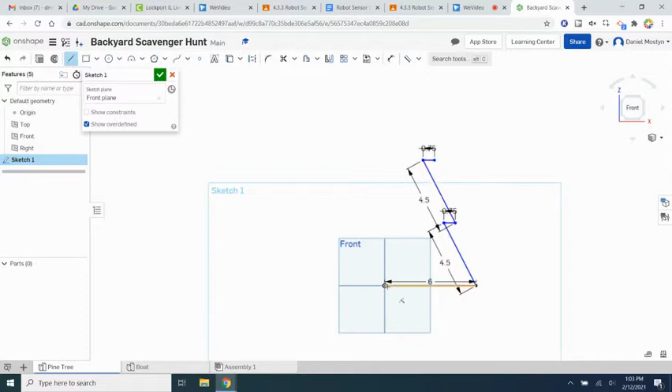All right, so that's the first object for my scavenger hunt. Let's go ahead now and do the boat, and then we'll make some drawing sheets that we'll use. So let's do the boat next.

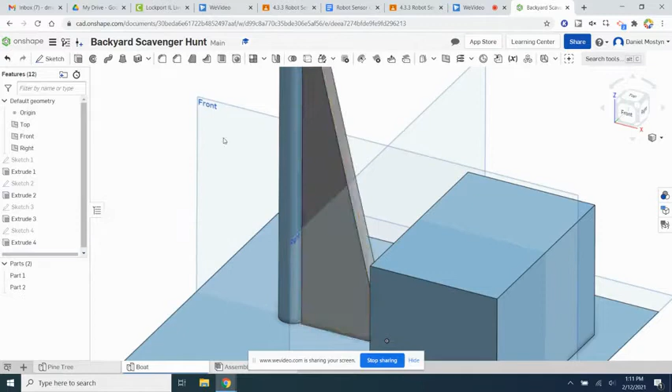All right, so this is not like an awesome boat by any means. It doesn't even look like the boat in my backyard. That's my neighbor's boat. It's a sailboat, but whatever. It's not a big deal. It's the idea of a boat, I guess.

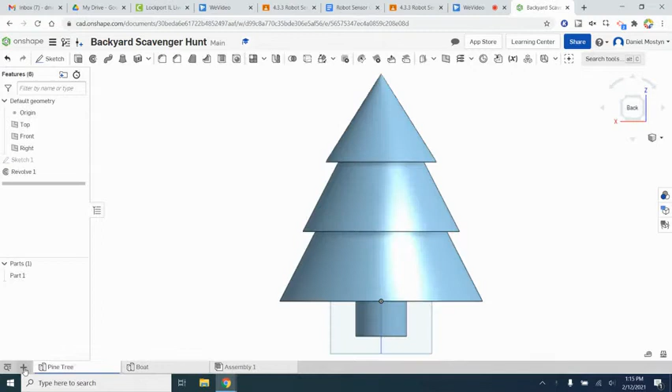All right, so the next thing we want to do is, with our pine tree and our boat, we want to create a set of drawing sheets. What we're going to do is we're going to dimension these so that someone else could recreate them exactly. So I'm going to go in now and I'm going to dimension both of them. We're going to do 2 sheets.

Okay, so let's just open up the browser first. We'll click the plus sign. There are 2 sheets now. First sheet, we'll do the tree. And the second sheet, we'll do the boat. And we'll use these on our ThingLink eventually. All right, let's get started dimensioning.

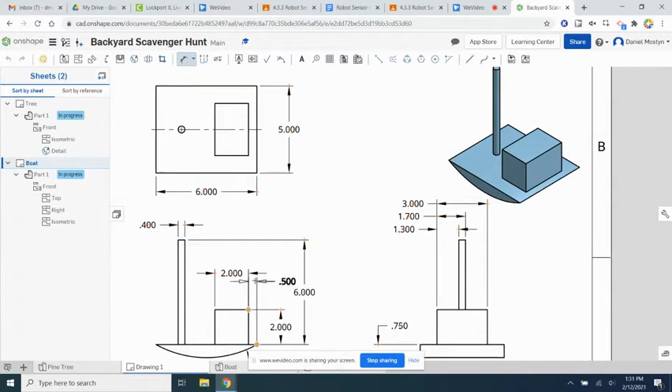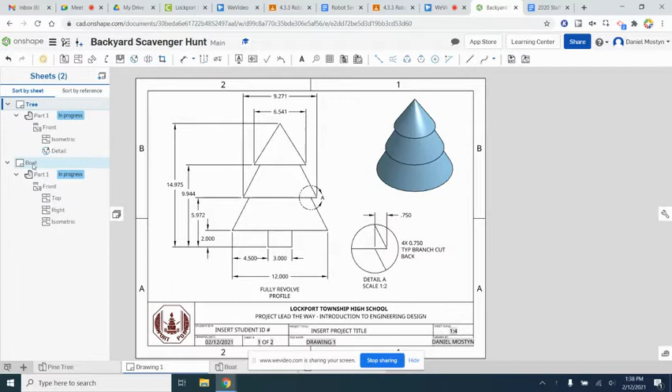All right, so I've gone ahead and I've dimensioned both of these drawings. Here's the boat, here's the tree. You might need to put notes in here or use a detail. The detail is right there to kind of explain some of the stuff in your drawing. You know, if you can get away with fewer dimensions, the better, but the person has to be able to replicate this part exactly.

So here's what we're gonna do next. We're gonna come up here to the three little dots and we're gonna click print. And it makes a PDF for us. So it makes a PDF with both of them on here.

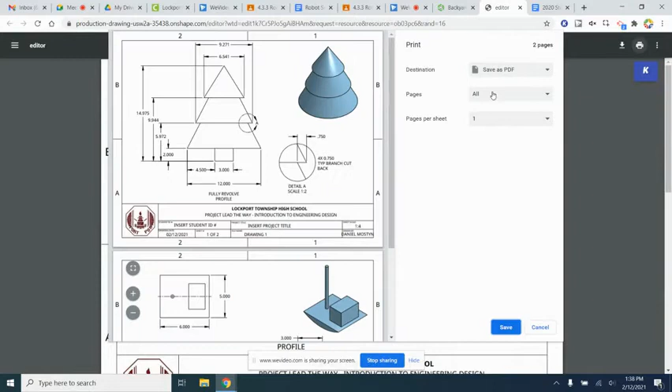So what I'm gonna do is I'm actually going to click the print button and save as PDF because I need to save these separately. So I'm gonna say page 1, that's my tree. We'll click save. And I'm gonna put this in my Google Drive. I'm gonna save it in a document.

Let's see here. I'm gonna go in and we'll save it in a new folder called Backyard Scavenger Hunt. Okay, that's gonna be the folder. And we'll name this tree. And then we'll do the same thing for the boat. That's page 2. And there's the boat. So these PDFs are both saved on our drive.

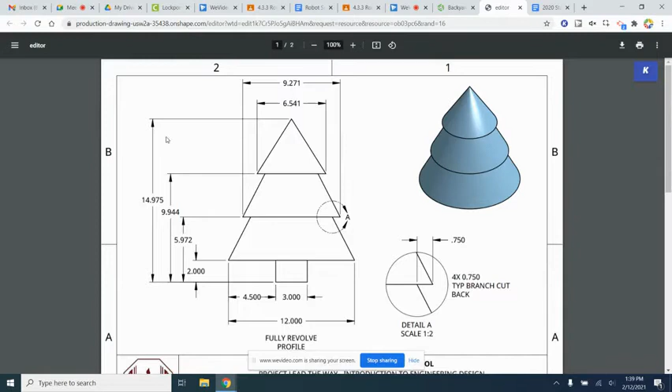So what we're gonna do next is we're gonna start putting in some of this stuff into our ThingLink. All right, so we're back on ThingLink, and this is the picture that I imported a little while ago. So I'm gonna click on this and click on edit. And now you can see here's our backyard, and the tree that I was going to tag is this one right here. So we're gonna click add tag. We're gonna move it so it's right there in the middle of the tree. And we're gonna do it text and media. So we want it to be that.

All right, first thing we're gonna do is to pick a tag, and we can pick any of these things. Let's pick a picture one, because that's kind of what we're showing. We're showing a dimension. So we could pick, I don't know, this looks like a good one. So that'll be the icon. And then what we're gonna do is we're gonna go to Drive. So I've gone to my Drive folder already. This is the drawing in my Drive, the PDF.

I'm gonna right click on it. I'm gonna get link. Let's make sure that anyone with the link can open it up. Click copy link. And then we'll come back over to ThingLink and we'll put it in right where it says button URL. We'll paste it there. So now this is where they will go to get the blueprint with the working drawing. So you put that right there and say something for the title. Say click here, draw the pine tree.

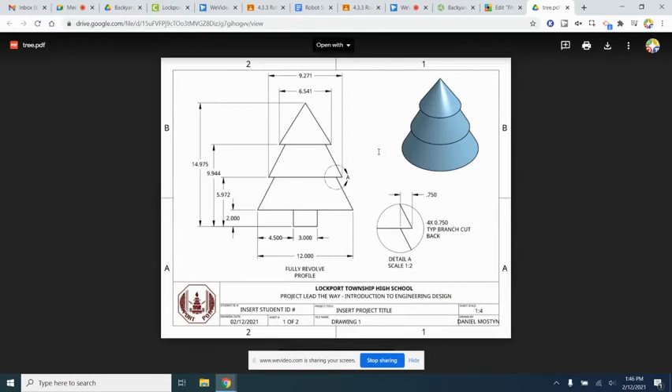All right, so now we click done. What's kind of cool is that when we click on it, it looks like this, and then we click on this, and then it brings us right to the pine tree. Okay, so that's good. And we need to do the same thing for the boat.

Next thing we're going to do is to make a Google form so that way the people can put the volume answers into a form. So we'll do that with the tag in a little bit, but let's go to our Drive first. And what we'll do is we'll say new Google form, create and share. And we'll just say this is the Backyard Scavenger Hunt. And what we'll say is we'll ask for the name. What is your name? You can put email address in, whatever you want, right?

And then we'll add another one in and we'll say what is the volume of the tree. We're gonna make this a short answer, make it required. We'll duplicate it and we'll do the same thing for the boat. And now what we need to do is basically make it like a quiz kind of. So we're gonna do response validation for each one. All right, so what that means is that we need the number to be in between two things, right? So we're gonna put between, and we'll do the same thing for the boat, a number between.

And now we just need to go and check what the volumes of the tree and the boat are to add our response validation. So we're gonna go to Onshape and we're gonna go to the actual Part Studios. Here's the tree. We'll click on it and we'll click on the part, and then we're also going to click down here where there's the mass and volume properties, and we can see that the volume of the tree is 544.414. So what we're going to do is we're going to just kind of copy that right now, and we're going to bring it over here.

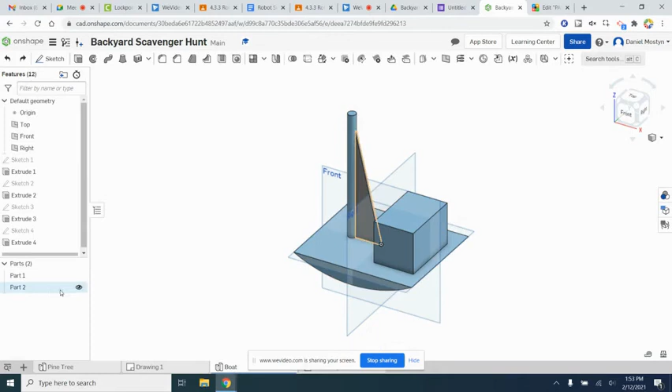So the boat is over here. And I think this was what I ended up using for the boat. So it's 27.94 was our volume. So what we'll do is we'll say in between 27 and 28. And once again, we could say try again if they don't get it right.

Okay. So now what this looks like is we can look at the preview and we can say, what is the volume of the tree? Now, if we put in 65, we could say, oh, it's not right.

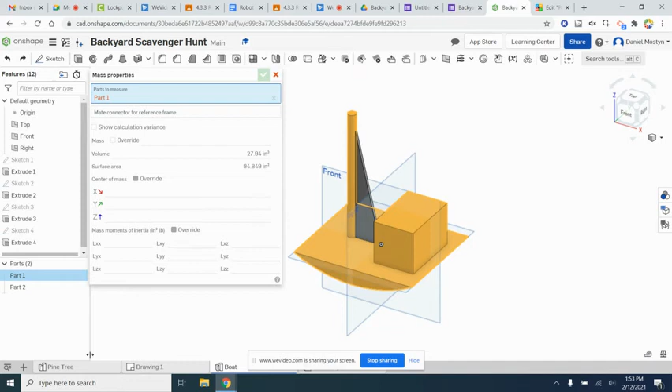But if the person goes into the tree and sees that the volume was 544.4, they could put that in, 544.4, and you can see that it doesn't give them an error answer. And so the idea is once they submit it, they pass the scavenger hunt sort of thing. And you can kind of be creative with this.

Like you can say, let's say after they get through this, we can add a section. Oh, that's not right. We didn't want that. We add a section down here, and this section could just be like, congratulations. And we can put like a picture in here or something like that. So we can put a picture like that. We'll look for a picture. There you go. You put a video in there, whatever. So there it is.

So, woohoo, right? So if we go back to the live form, let me try to do that again. I think the boat was like 544. No, it wasn't. It's at the tree. Yep, and the boat was like 28 or something like that. Yeah, that's good. And we hit next and say, congratulations, you did it, right? So you could be creative with how you want to celebrate. And then that's basically it.

So now what we need to do is we need to get that live form link into ThingLink. So we'll go to our preview for our live form. We're going to copy this. We're going to go back to ThingLink and we'll add a tag. I'll put it in the middle maybe. And we'll just do, let's try content for website. There we go. And we'll paste the form in there.